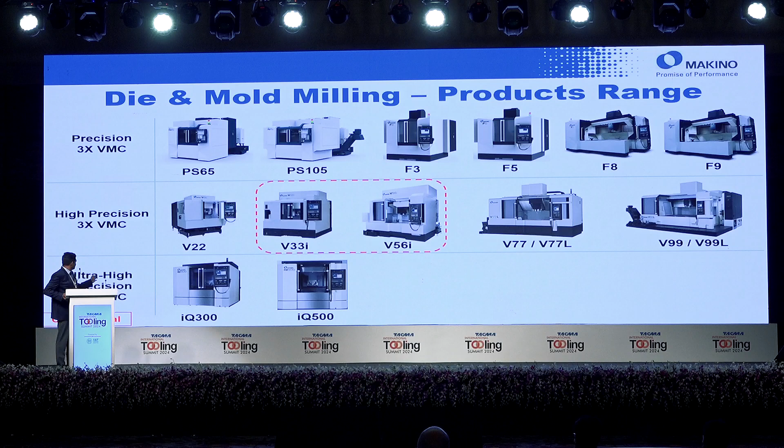And this is our Makino product range. It starts with precision 3-axis VMCs up to ultra high precision 3-axis VMCs. And these are the two machines' key specifications, starting with 650 by 450 and 900 by 550.

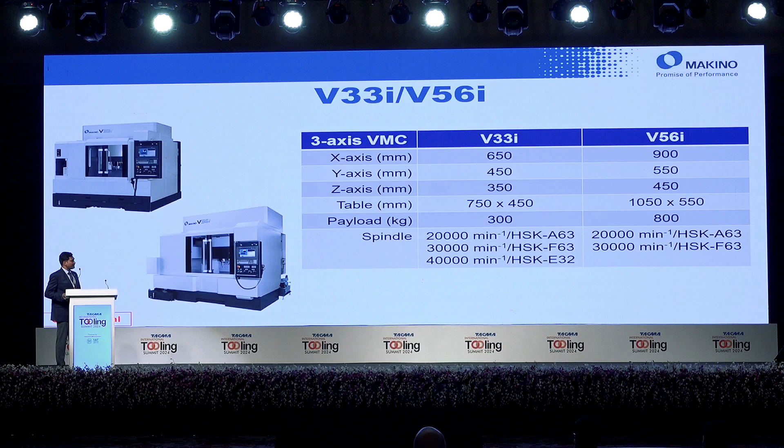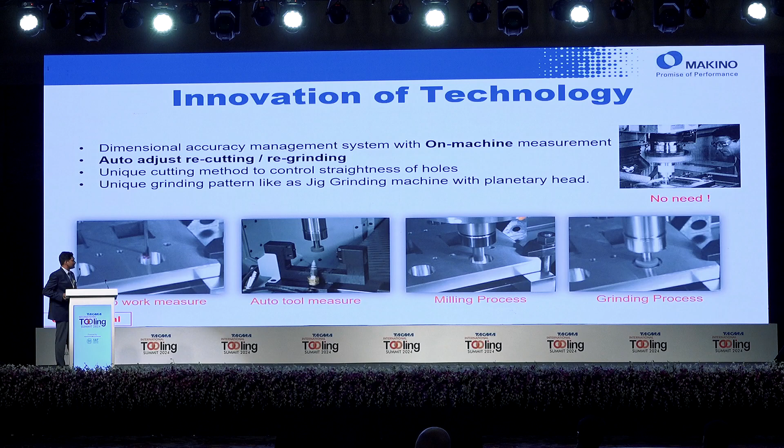So these are the technology innovations I've listed here. Dimensional accuracy management system with on-machine measurement. For on-machine measurement, a lot of prerequisites are required, listed below. Grinding process: the machine should be capable of handling grinding applications. Milling, of course, a VMC can handle. Auto tool length measurement and auto work measurement. These are the prerequisites required for this particular process.

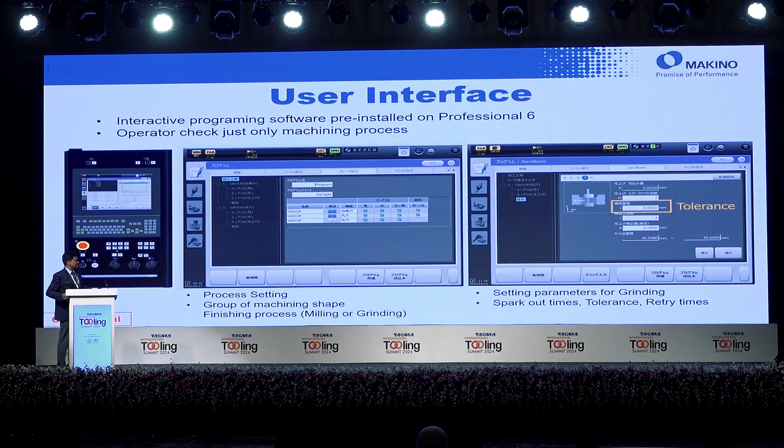So you might have seen a lot of sequences and processes involved in this demonstration. Those operations can be simplified with simple GUIs developed by Makino. The operator has to give a few inputs like the finishing process, milling or grinding, material coordinates for the machining, cutting stock, NC programs that should be run, and the shape of the feature. This is not only for circular holes, but also for rectangular shapes. The point is, when we give certain inputs to the controller GUI, the controller is capable of calculating its own cutting conditions and cutting tools.

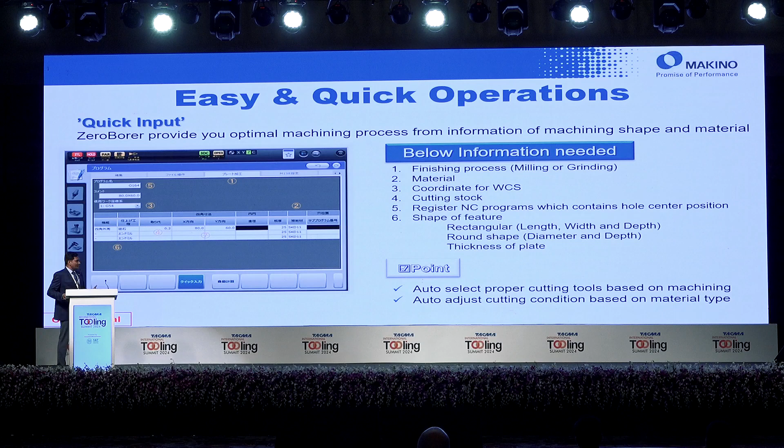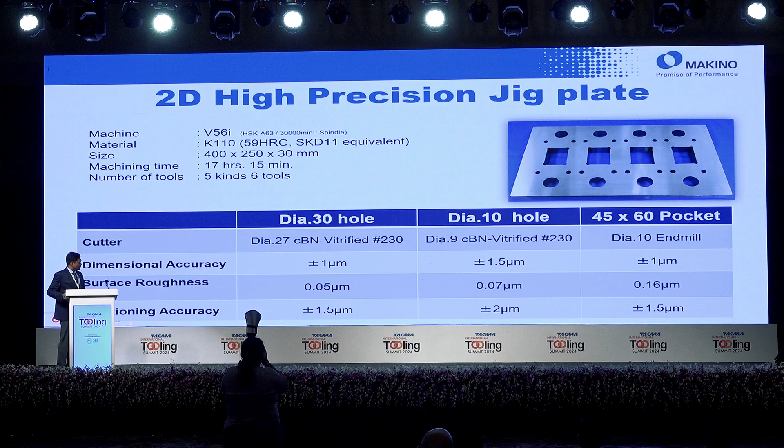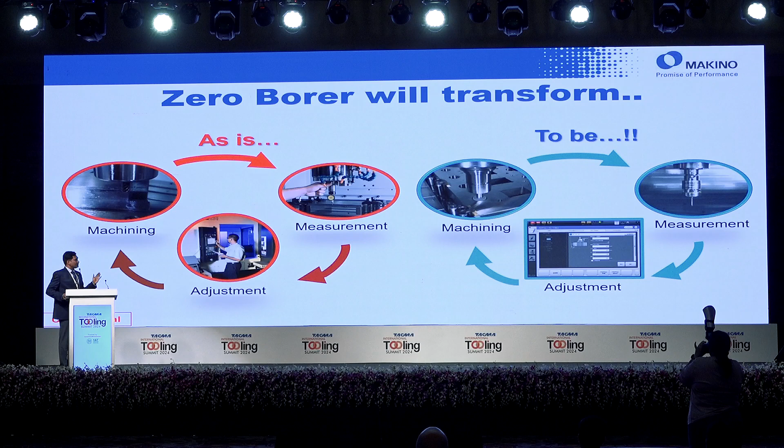Okay, this is the final result of the case study. You can see the diameter 10 hole. There are two hole diameter sizes here and one rectangular pocket. The 30 diameter hole is about plus or minus 1 micron, the 10 diameter hole plus or minus 1.5 micron, and finally the 45 by 60 pocket is about plus or minus 1 micron. So in the end, by implementing such a process, the traditional process can be easily transferred to an automated process like Zero Borer.

Okay, so the second innovation that I'm going to talk about is a solution for automotive lighting parts.

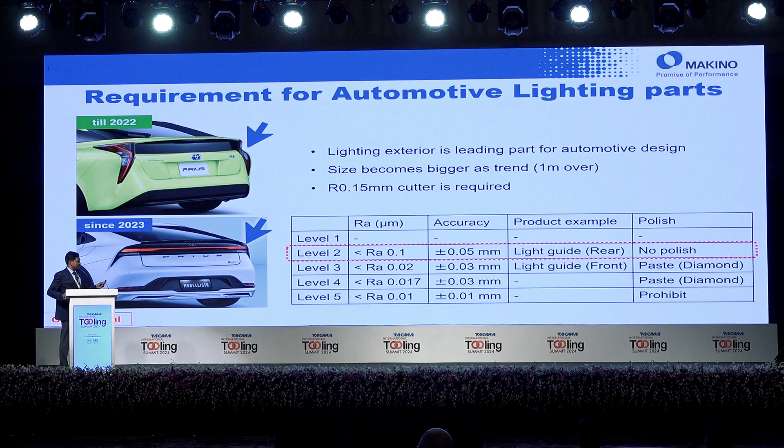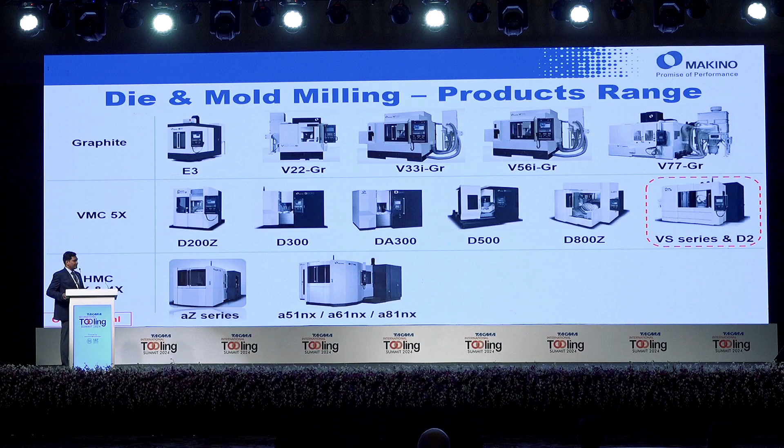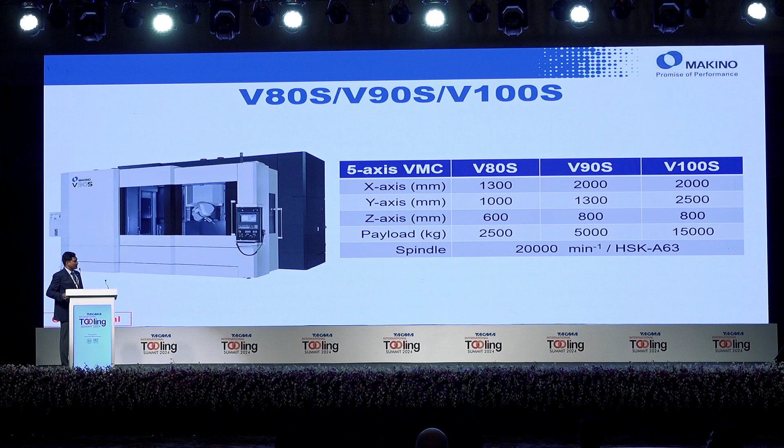There no polish is required, product accuracy should be plus or minus 50 micron, and the strict requirement is surface roughness. Surface roughness should be less than 0.1 Ra. So the process which was developed by Makino to serve this lighting industry is readily available in our VS series and D2 series. VS series is nothing but 3 different series: V80S, V90S and V100S. The machine starts with 1300 by 1000 millimeter in X and Y, and the largest machine size is 2 meter, that is 2000 and 2500 in X and Y.

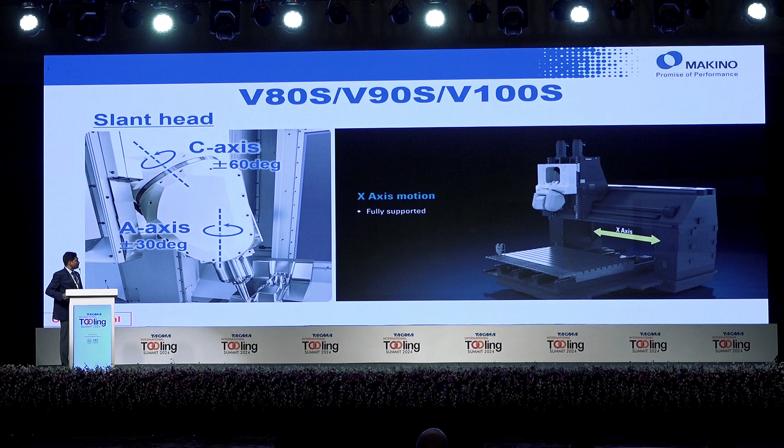Here is the axis simulation of that particular machining center. There are 2 rotary axes located on the spindle with a slanted head. The limitation of rotary axis is plus or minus 60 degrees in C axis, and plus or minus 30 degrees in A axis. Okay, so 60 and 30; when it comes to simultaneous 5 axis, you can use 30 degrees for your simultaneous 5 axis milling process.

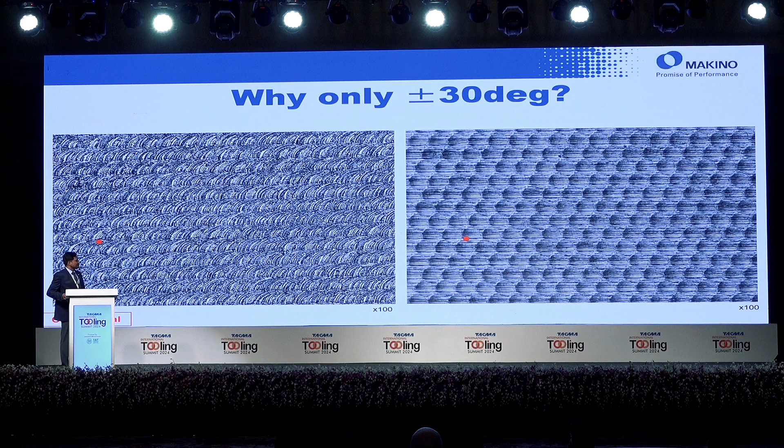Okay, you may ask why 5 axis and why 30 degrees is the limit on this particular machining center. The reason for choosing 30 degrees as a maximum value: when you use regular ball nose cutters with a 2 fluted or 4 fluted edge, the tip cutting will always spoil your cutting edge. This is about 100 times magnified images of machined finished surfaces, same RPM, same cutting feed rate and same machining center. You can easily see the difference of surfaces. The surface with 30 degree tilted machining is acceptable for the lighting industry. So this is one of the reasons we stick with plus or minus 30 degrees.

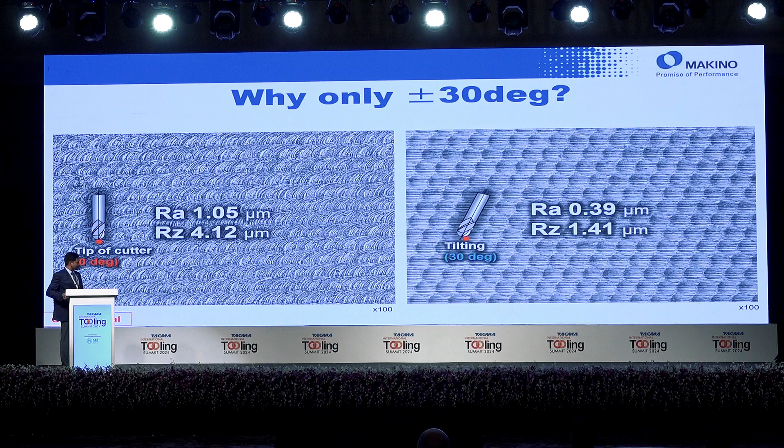Okay, and the second thing, everybody has a vision of having a 5 axis machining center, but will a 5 axis machining center really improve your productivity? Yes, here is the solution. You can see a 6 fluted cutter on the left side, and a barrel and lens barrel cutter on the right side. With the 6 fluted cutter, the red line shows 0 to 15 degrees. On every cutting tool with more than 2 flutes, you can see the cutting edges meeting points are 2 fluted, and that will be limiting until 15 degrees.

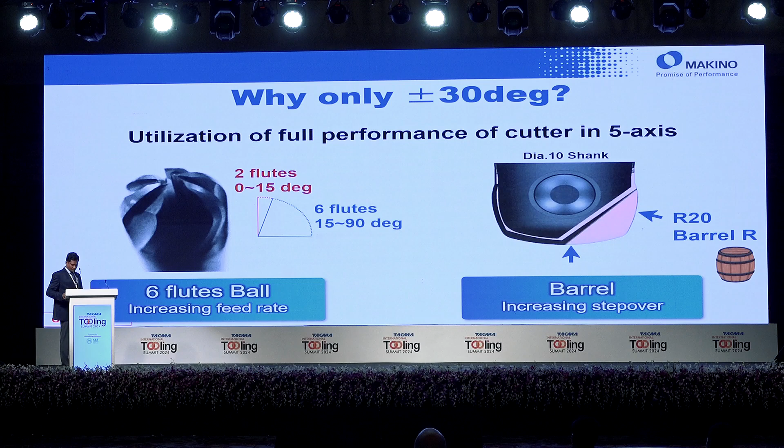So only if you cross the 15 degree limit will your productivity become bigger, because you will be getting 6 effective cutting edges on this cutting tool. 6 cutting edges means you will be multiplying your feed rate thrice, so that will improve your productivity. At the same time, a barrel tool is always good for simultaneous 5 axis application. Why? Because you get a bigger radius: on a small diameter cutter, the cutting radius becomes bigger, which helps us go to more feed rates and more step overs, meaning XY pitch, cutting pitches, without compromising surface finish. So these are the 2 things enabling increased productivity in a 5 axis machining center.

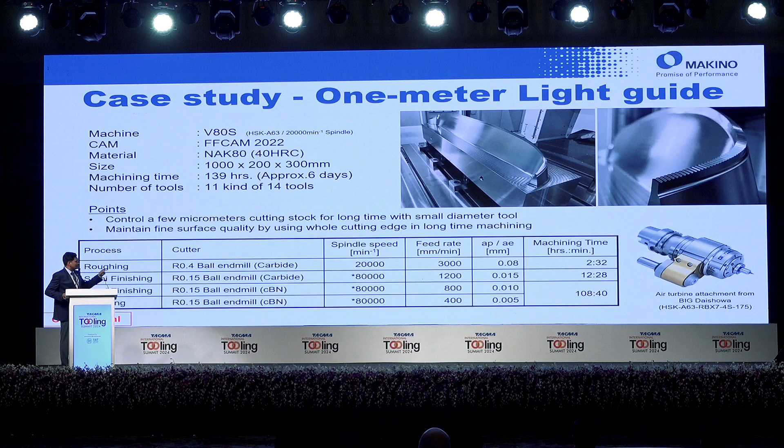It starts with a 0.8 ball nose, 0.3 ball nose, and following that a 0.3 CBN ball nose. As mentioned here, for spindle speed, we started with 20,000 RPM, which is standard on this V80S series, and the second one 80,000 RPM. We say 20,000 is the maximum RPM, but still we were able to use 80,000 RPM because of an air turbine spindle attachment. When it comes to air turbine spindle attachments, there are very few players which are very reliable for this kind of long operation.

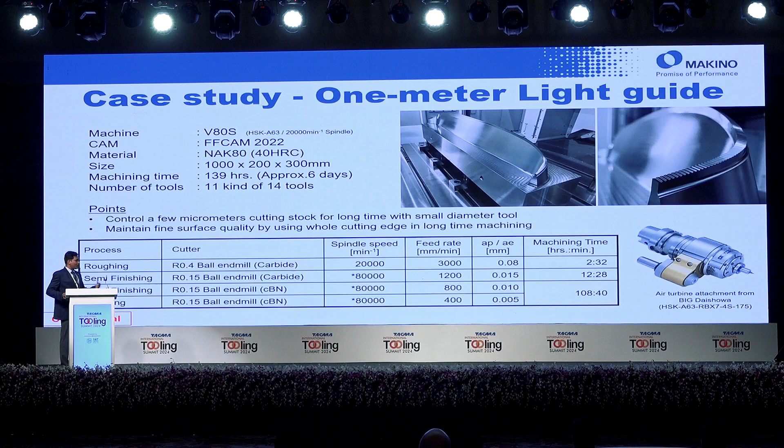BIG Daishowa have come out with this, but it has its own limitations also. Makino have come out with a new spindle, an air turbine spindle, which is very sleek for this kind of application, and when it comes to rotation, this will be more accessible to the workpiece.

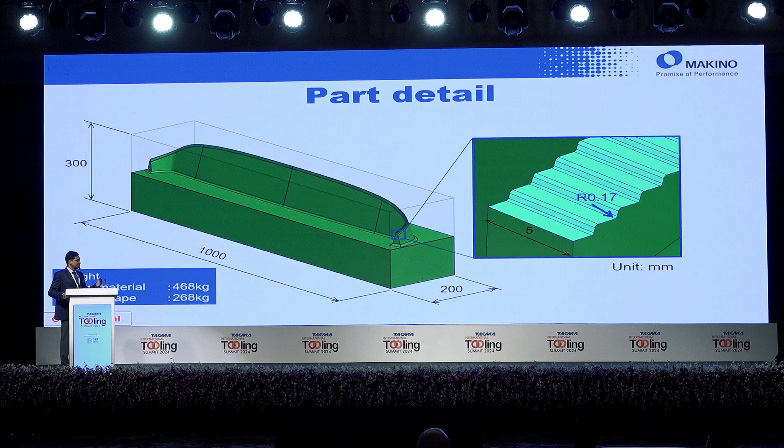This is about the shape requirement. You can see the corner radius requirement is R0.17, which means I am limited to using only a 0.3 ball nose for finishing. At the same time, I should not use multiple cutters, otherwise this will cause mismatches on the surfaces. So in such a case, I must use a single tool for the finishing application.

This is about the machining time. The total machining time is about 108 hours, 40 minutes, which is about 4.5 days, inclusive of semi-finishing and finishing application. In finishing, the condition is the stock amount.

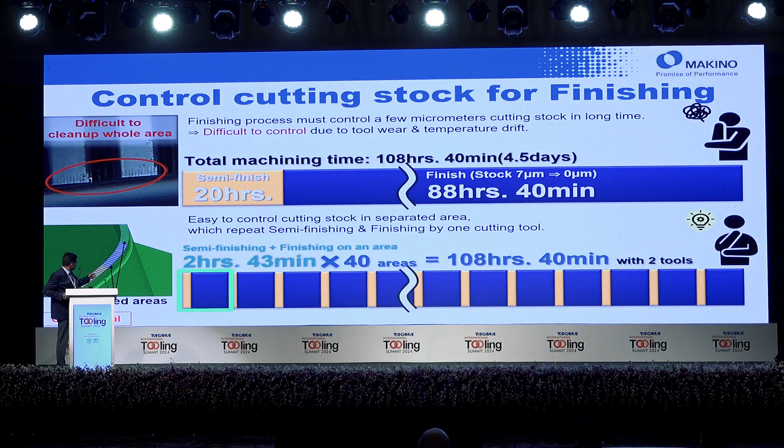The point on this particular job is semi-finishing and finishing on area, 2 hours 43 minutes per area. Here at the left side you can see the different colors. Those different colors indicate the area, the machining area. This is our approach to the cutting machining process.

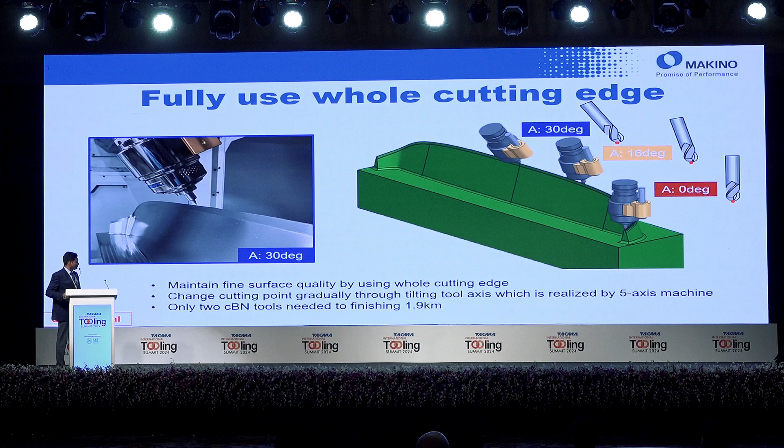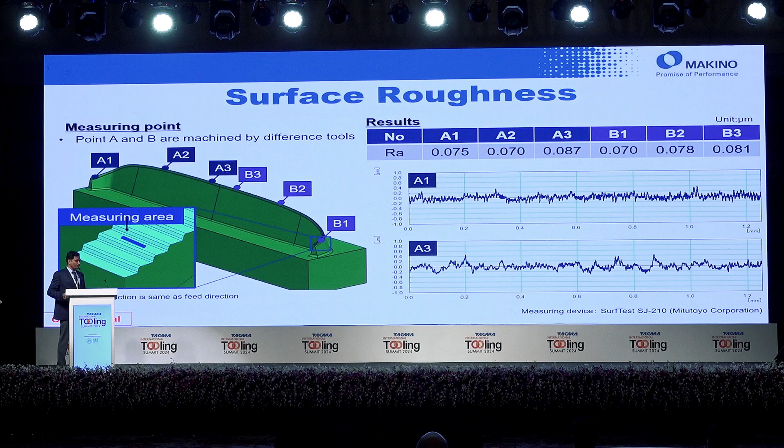You may ask, if we use a long machining time, how the tool life will be. So the tool life of the particular finishing tool is about 4.3 microns after running for 54 hours 20 minutes, which is a proof of the spindle's quality.

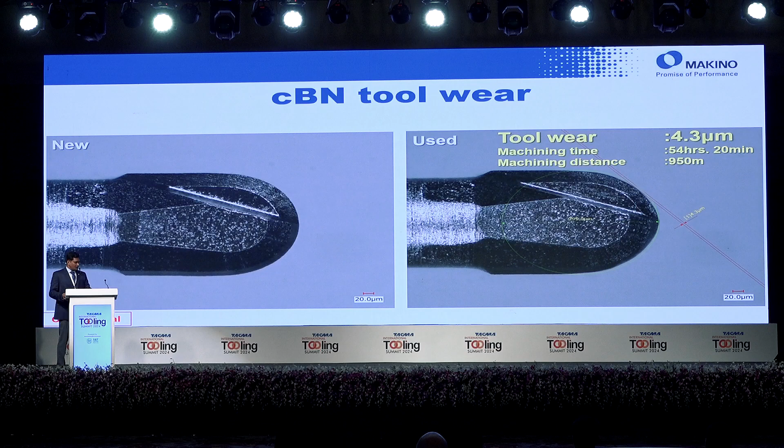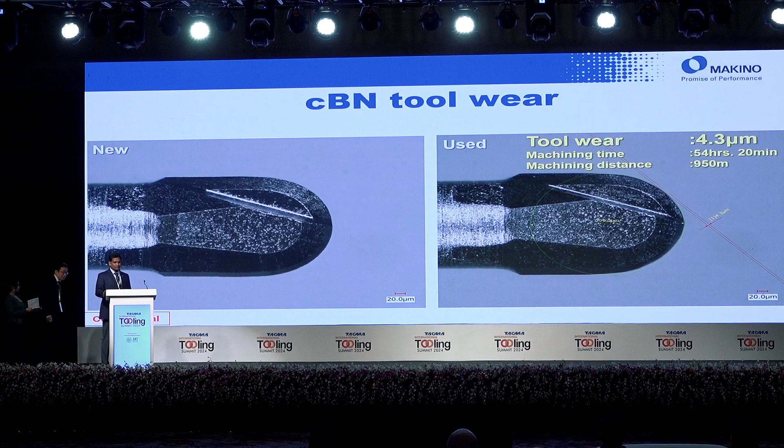Thank you. Thank you so much, gentlemen, for that innovative technical session.